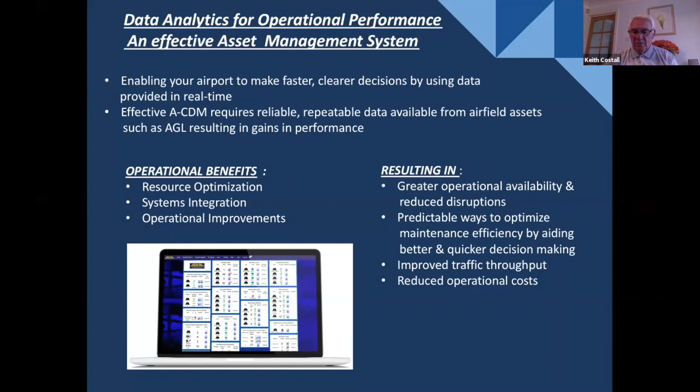But we've got a lot of challenges out there. A lot of it is because we've got to maintain an AGL system that is going to be used for different functions, like individual light control and monitoring as part of an advanced surface movement guidance system of today. And the bigger issue is that, until COVID-19 of course, the demand on a runway and taxiways, the density of aircraft, has increased tenfold in the last few years.

And therefore access for maintenance is also very, very difficult. So if you stay in the old traditional maintenance methods, filling in paper and signing bits of paper, then putting it into the office for somebody to copy onto the computer, it's time consuming and a big issue for us. So hence the need for an asset management system.

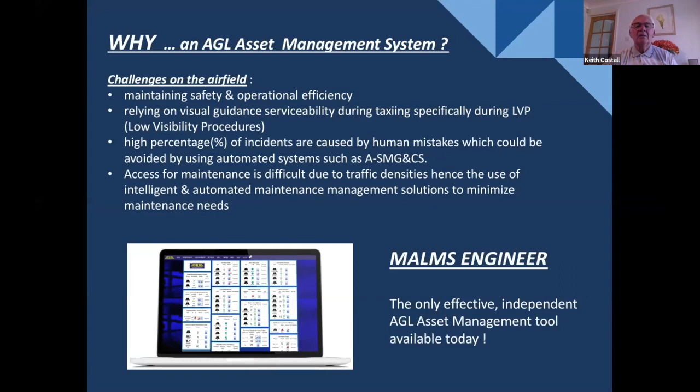And how do we use it? Well, we use it in an electronic format, so that if we do a particular function in the field - and we're going to learn a bit more about that from Rob later in this presentation - to utilize it, we need it to be in real time.

So if we go out, it's a bit like Amazon delivering something to your house. You don't sign a piece of paper now, they just press a button, that's it, you've received it, you've accepted it. It's electronic. And way back, immediately, Amazon knows it's been delivered safely.

Same thing for AGL. We go out in the field, we do a torque test, we do a photometric test, we change a light fixture, we do a cleaning, whatever it is, rectify a fault. It's a matter of just, in real time, pressing a button - bang, the records are there. Job done.

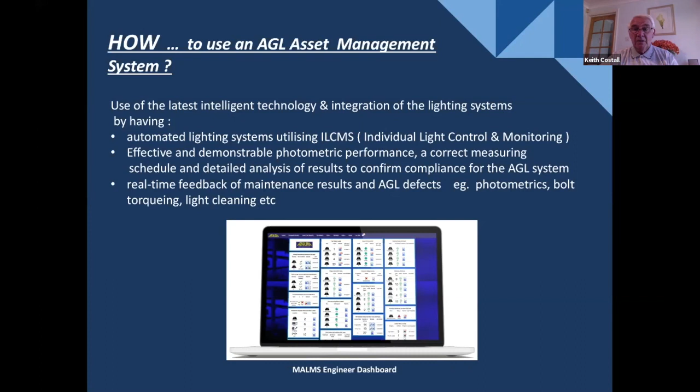I mentioned earlier about civil, mechanical and electrical. Well, civil and mechanical are the two elements that have really been outside the electrical side in many ways, because AGL personnel tend to be electrical people, and electrical people have come from constant voltage technology. So to go airside and work on AGL, you suddenly need to understand current-based systems rather than voltage-based systems. There is a difference, but we're not going to go into that today.

But on the civil side, we need to be thinking about the pavement, and there are new standards coming in from ICAO associated with how we're going to record civil engineering - the state of the runway and taxiway pavements, whether it's concrete or asphalt.

Mechanical, we're back to this torque tightness. We secure the light fixtures in pavement, or inset lights into a base unit, a can or whatever you want to call it, that we've already glued into the pavement, and they have to be torqued down to a particular torque tightness.

One of the big issues that came to me in the early days - someone said, 'Oh, we don't like this electronic method because that's Big Brother watching us.' I said, 'No, actually, we can prove that you did the job correctly, because one of the aspects of the electronic torque wrench is that unless you torque it correctly in accordance with the model of light fixture, it does not allow you to record the result. And therefore, you're actually proving later that you did the job, if there were to be an incident.'

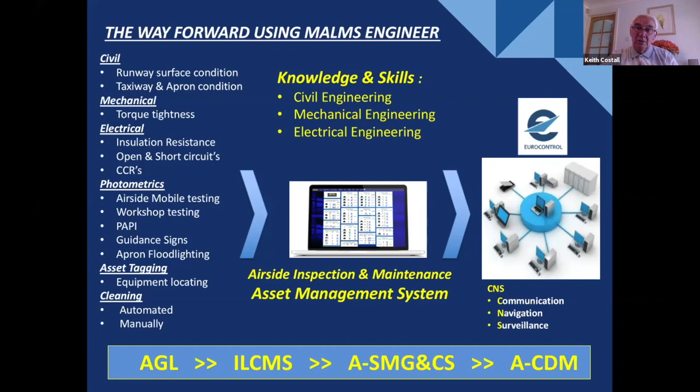Not only do we do mobile testing in the field, but also in the workshop. And that's where asset tagging comes in, because we can tag exactly where the light fixture is in the field, but we also can tag an individual light.

So I'm going to get on with this case study, based upon the airside asset management at London Stansted Airport in the United Kingdom. We have to thank Stephen Ryan, a consultant engineer who has been both the asset manager for the civils and electricals at London Stansted, and more recently as a runway asset lead. Unfortunately Stephen cannot be with us today—things have changed with COVID-19 and we have to prioritize our function because of that. So that's why I'm actually giving the presentation.

Let's have a look at the scope of the case study, and at Stansted, where Stansted International Airport comes from. It's part of the Manchester Airport Group in today's day and age. We'll look at how they integrated the MALMS asset management system with MALMS Engineer, the equipment associated with photometric testing, into day-to-day management, and how it enabled Stansted to justify changing the runway and taxiway lights from tungsten halogen to LED.

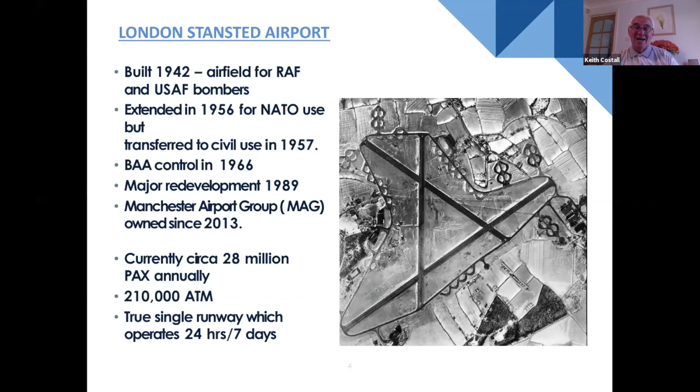So what have we got physically in Stansted? We have around 5,500 light fixtures, both on that single runway and on the associated taxiways, 176 guidance signs, and 134 CCRs. Now that's quite extensive—yes, it's not a big 2, 3, 4 runway airport, it's a single runway airport.

This is pretty extensive, and we have a structure of how we put together the maintenance team—there's 4 maintenance teams, and if you see here, 3 persons in a maintenance team on a shift, and that rotates on a cycle, supported by a day team.

So anything that is associated with the airport is managed by those guys. Now here's a picture I took taken off. If you went on to Google Earth, for example, and zeroed in, this is basically what you would see. So single runway.

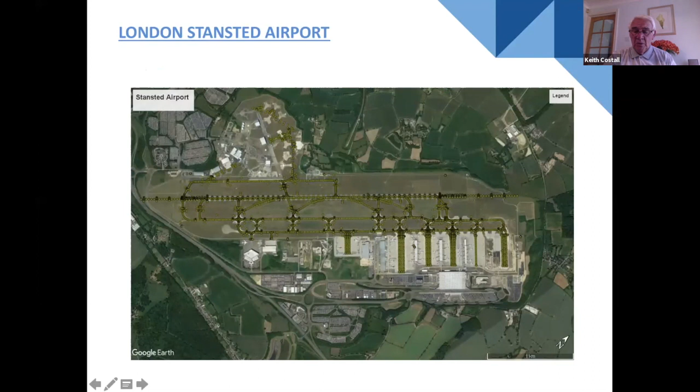Associated taxiways with stands. Stands are next to the main terminal and some remote stands. So where have we come from? Where we really come from is that to integrate MALMS into the maintenance management system, we started off doing photometrics, and that started around 2001, something like that, in Stansted to do photometric testing. But it wasn't until 2016 that it started to integrate into an asset management tool, so before that it was really a standalone.

Green demonstrates a compliant fixture, that is above 70%, not yet needing maintenance. The blue is between 50% of light output and 70%, which demonstrates you should be doing maintenance, and the red shows it's below 50%, then that is a non-compliant location. So that's the scenario how we look at it generally.

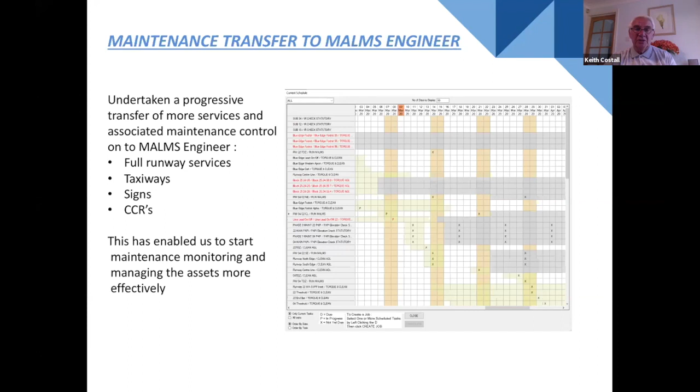As I said earlier, it demonstrates compliance, and what we can do is extract it, and Rob is going to go through it a little bit more intensely afterwards. But we can extract and present it in many ways, whether you want it on a spreadsheet, whether you want it in an email, whether you want it on a bar chart, there's different ways of presenting the accuracy. And it's not just accuracy, it's the repeatability upon demand in real time.

So we're in this period of checking performance in a progressive way, so that we're going to be looking at maintenance not just by saying okay, we'll do this task every day or every week, or I think the light looks dim, we'll have a look at it. We still do those kind of checks, they still do the runway checks down the runway periodically, and if a light fixture looks dim or out, it's recorded still in the same way.

That doesn't go away, but what we can do is input all the methods of being able to test compliance, whether it's cable damage, whether it's earths on the circuit, whether it's photometric, or whether a bolt has been recorded as coming loose. All those kind of things, we can measure the performance and record it in real time.

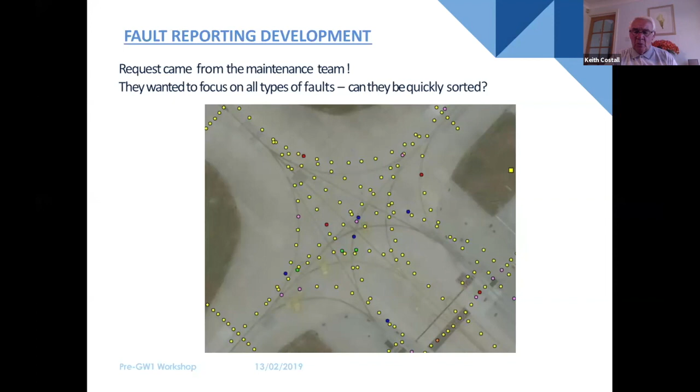Moving on, just to re-emphasize that.

How did Stansted utilize the introduction of this asset management, the MALMS Engineer and the dashboard into the maintenance management system? Well, one of the aspects previously was the fact that maintenance was being done, and it was being done by an effective team. But how could they prove it?

And how, when it came to saying, can we now transfer and migrate from tungsten halogen to LEDs? There is a drive in the industry to do that, and it won't be too long before manufacturers will no longer offer tungsten halogen at all, and potentially not even support them. So we've been driven down the LED route.

So to demonstrate why, if you've got the records, you can demonstrate how the introduction of LED is actually saving money. It will pay for itself. There will be a return on investment. LED fixtures are more expensive than a tungsten halogen fixture, but the return on investment is pretty quick. Now, all manufacturers claim different returns on investment periods.

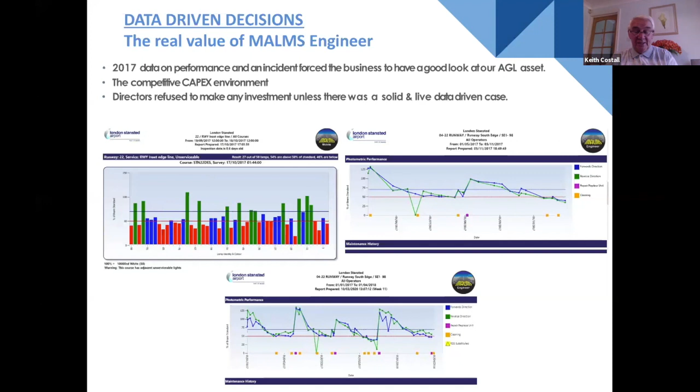It certainly helped Stansted, and it helped them with the decision of getting some of the capex money. Capex, for those who don't really understand, is the overall capital expenditure associated with how you invest into the future, and so the migration to LED was part of the capex.

So what is the real value? Well, previously in the paper era, it was always based on assumptions - let me show you this, let me show you that. This has really strengthened the business case, being able to demonstrate that the asset, as an AGL, has definitely improved and is saving us money.

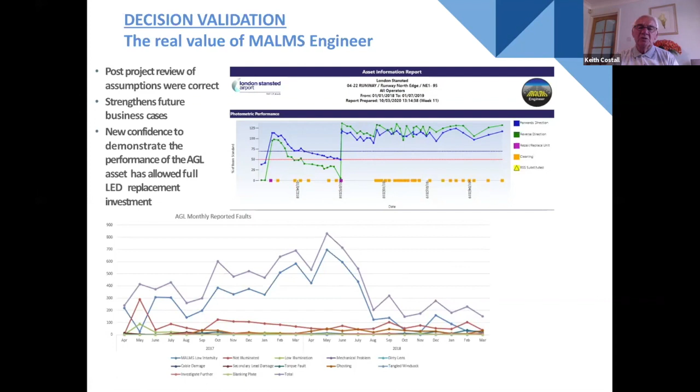Until we got to a stage of replacement between tungsten halogen and LED. Now, some of this was associated with cleaning cycles - we cleaned, then it deteriorated, then we cleaned again, then deteriorated, and other maintenance. But once we got to the LEDs, it's been a dramatic change. So it's a really good function and a good decision to have an asset management system, however complicated our airport is.

But now that's what we've got. So there's a dramatic change. And I think this is a good time for me to say, Robert, maybe you should come in now, because it's this migration from tungsten halogen to LED, but it's also the demonstration for IRVR credits, which is a UK based thing.

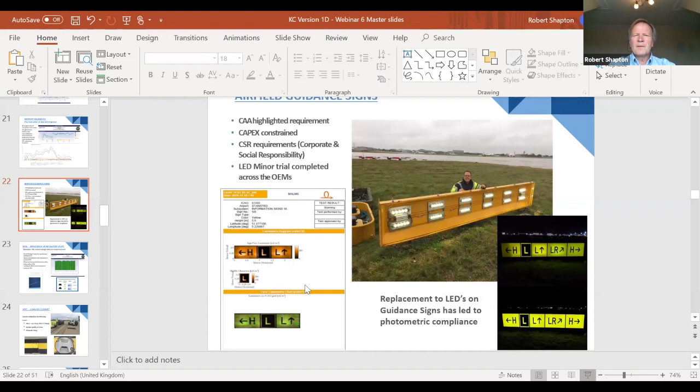Thank you, Keith. Excellent presentation as usual. Yes, so as Keith says, we were involved very much. We work with airports to help them. A lot of the initiatives have come from MALMS Engineer developments from our airports, our customers who need the information.

Increasingly, if you have a problem with signs, you need to get capex to be able to invest in them. So you need to do an evaluation to determine - because I believe we're talking about several £100,000 in the case of refurbishing these. But you have to compare the investment decision to replace or to upgrade.

And then with TMS, we provide the monitoring in terms of the results from the inspections, to support the business case. We also provide the tools to provide the measurements. We have a sign testing piece of equipment, which some of you are aware of, that we're now using at airports. It's not released for customer use yet, but it very soon will be. That is currently being operated by TMS, and we're measuring signs at Stansted, and there's Marcus Jelliman there.

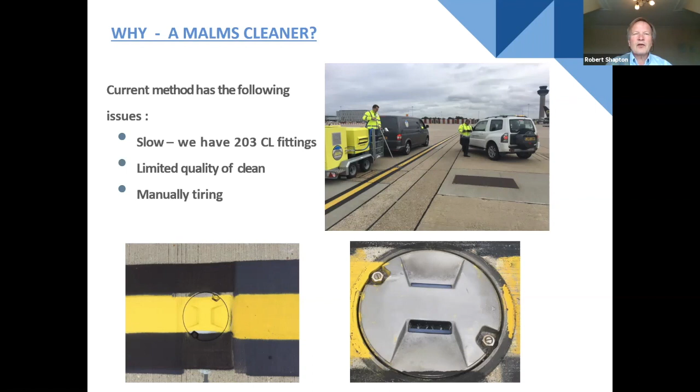So as a result, CMS some years ago were asked to develop a solution, and we came up with a bicarbonate of soda pressure cleaning system. It does not use any fluids. It's biodegradable, the powder, and it's highly effective. We discovered it's actually used for cleaning architectural buildings, and it is now being widely adopted.

Stephen Ryan has taken the machine into Stansted and has shown very, very good results. Even though the team there are hugely diligent with manual cleaning methods, you can see from the chart, using the MALMS cleaner, they were able to achieve their best ever photometric results. So while they were compliant before, they are now even more compliant, meaning the required period of maintenance and cleaning is less frequent. For a single runway airport, that's a highly critical factor to improve runway availability. You do not want to interrupt operations, or certainly as little as possible.

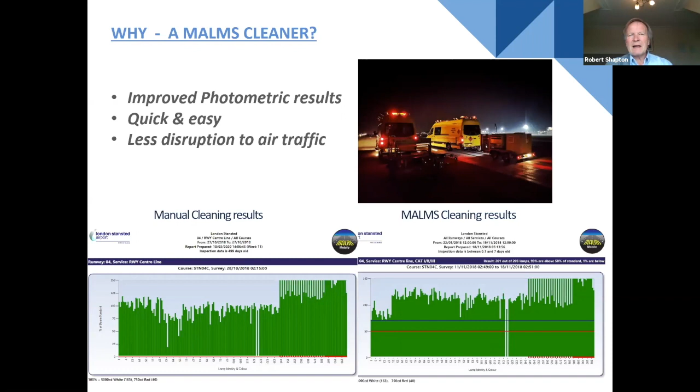So other areas of benefit from the measurements, as Keith has been pointing out throughout this series of webinars, you cannot manage what you do not measure. So actually capturing digitally the results of the work you're doing to maintain your runways in all respects is vital to asset management. That is the basis for your asset management, your decision making, and your business cases.

One of the benefits they've found is by recording the performance of their assets, for example their lights and the components used in them, they've been able to hold manufacturers accountable for aspects of the supply. They've been able to identify particular performance issues, measure them, and present real-time information to those involved, and to constructively engage in rectification. So it's proven very, very useful to Stansted and other airports.

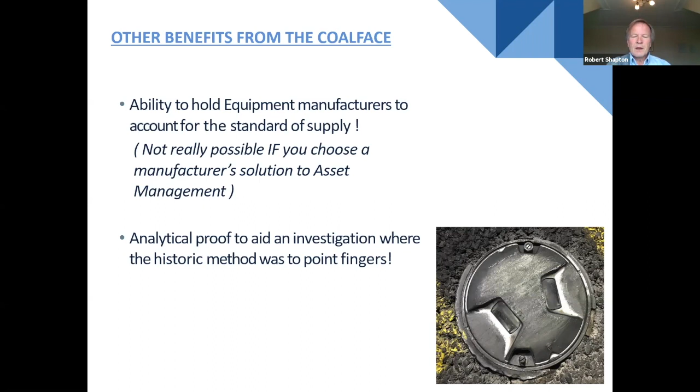The next area is civils. I have to admit that when Stephen came to me with this, and also our colleagues in Doha and Manchester, to include civils in the MALMS system, my heart sank a bit. We were so busy, but we're driven by our customer needs. So the team embarked on developing a civils package, which has proved extremely effective. The problem was, once again, that the systems available weren't particularly user-friendly.

They were also, in relation to civils, very static. The process was that periodic surveys were done, stuff recorded, and nothing was actually done real time. The tools are more in the nature of an audit, every one or two years, and then you go through a planning process, as opposed to real time capturing information.

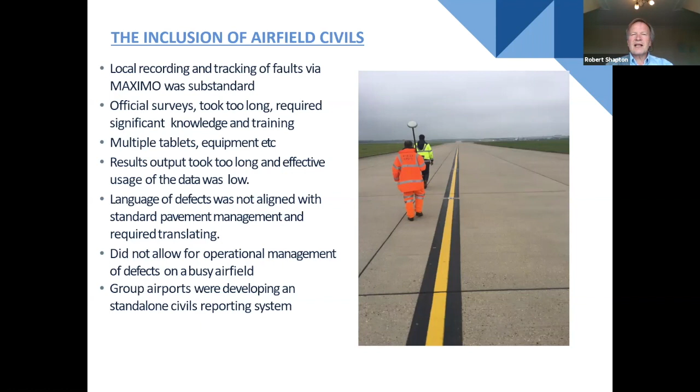What happened was that airfields doing their MALMS Engineer inspections using the tablet were seeing other faults, civils faults, and saying, well, why can't we record them on our tablet using our camera facility? Working with our colleagues in the airports, we developed the MALMS civil engineering package, which has been highly effective. At Stansted, they've developed some very new, market-leading, very effective methods of patching and doing selective resurfacing that has worked remarkably well. The traditional methods were annual surveys using architectural type equipment.

With MALMS, we've come along and use our tablet to record using the airfield map, logging the faults real time, recording the individual areas. We've developed a series of enhancements to meet the needs to categorize the different sorts of faults, to layer those faults as to when they've been identified, whether they've been fixed, how they've been fixed, the different types of defects, and then to use that information as part of the planning process.

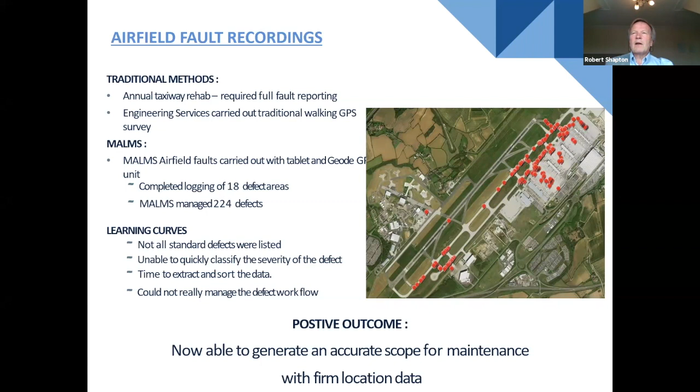This is a learning process. We've been developing this real time with customers, but I'm very proud to say we have a very responsive team, and the tool has evolved to give a very positive outcome, certainly for Stansted Airport and others.

Just very briefly, because we're running short of time, what they've been able to do is record the patching of civils faults, but then hold that information and use it to plan more serious resurfacing efforts, larger civil engineering projects requiring full closures, where they've been able to take up, based on the information provided, sections of pavement, and then in a two-layer process, replace those areas and those faults, which would traditionally have required a

resurfacing of the runway, have been shown to last, certainly some of them up to a couple of years now, without any sign of fault. So it's been highly effective, and I think very certainly worthy of investment at Stansted Airport.

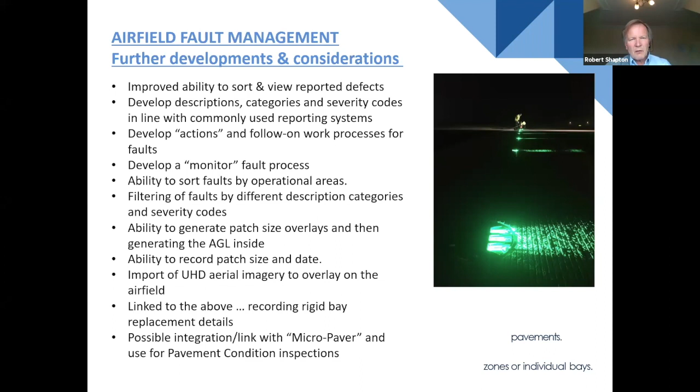But we're not stopping there. We're continuing to develop the process. I've been asked to look at integration with some of the traditional asset management packages or pavement civils packages, such as Micro-Paver, and we're in discussion with them. So watch this space. Like everything, what was good enough today is not good enough for tomorrow, and we're looking to keep up with the times.

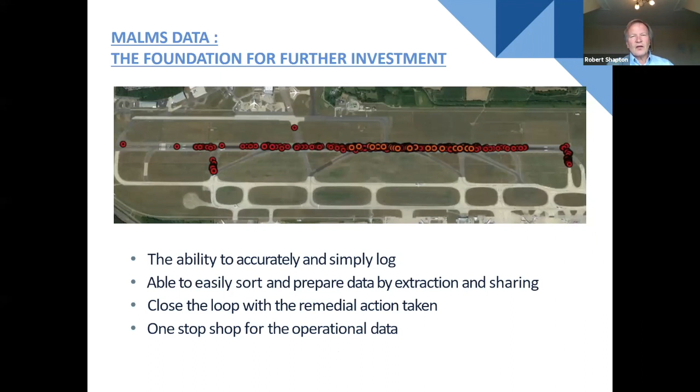So it's a foundation for asset management. It's a foundation for future investment, but you can't do any of that unless you can support it with the business case, which requires the measurement information to measure the problems and to show the effectiveness or otherwise of the solutions being employed.

Looking forward, as I said, nothing ever stands still at Stansted and other airports. We're now looking to track the performance of the fittings, not just the location. In the past, we looked at a particular place on the runway, a particular location, a particular service. But now, given the investments in all of the equipment at runways, we're looking to track the performance of those assets and manage the maintenance of those assets.

It's the whole life cycle. The runway is an asset, the AGL are an asset, the signs and the PAPIs, and they all have the same characteristics. They have to go through an acquisition process. So you need the measurement data to support the investment.

They need to be brought into service, checked for compliance on installation, and then monitored throughout service to make sure they're achieving the standards required. At the end, they have to be maintained, and there's a cost associated with that. So when looking at an asset, we have to consider the whole life cycle, from purchase to disposal, whether it's a runway, an AGL, signs, PAPIs, or any other equipment.

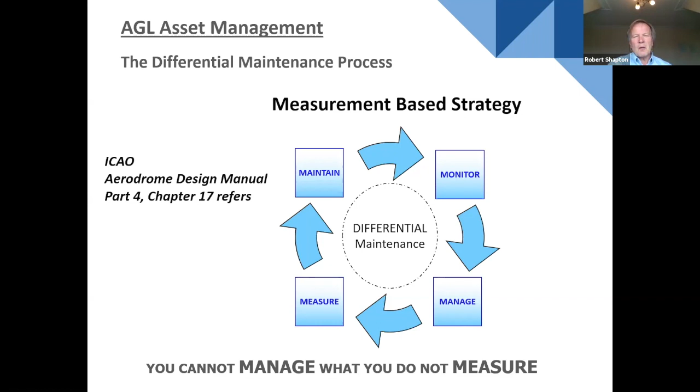We have the tools to do the measurements—the MALMS photometric systems, the torque management systems. We have the tools to support the maintenance, the recording tools to capture the data. We have the cleaning systems now, and within MALMS cloud and reporting, the ability to monitor and manipulate the data to achieve the optimal output. So, and I will not stop repeating this, you cannot manage what you do not measure.

So this all brings us nicely to the MALMS Engineer and dashboard. I'd like to introduce you to Rob Billingham. Rob is the mastermind behind this, and I'm so proud of the team—he's produced this wonderful dashboard supporting the information from MALMS Engineer, and he will now take you through some of the functions and features to understand how we turn monitoring into asset management.

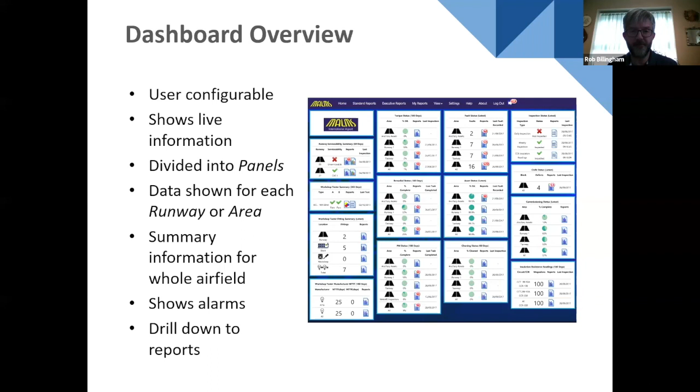Okay, so for photometrics, from the old MALMS office system, we've got runway serviceability, which is a bar chart broken down into service types - centerline, edges, TDZ, runway ends. And you click on one of those and you come down into your course bar charts, which we've already looked at, staple reports which engineers are used to looking at. And then you can drill down again into the isocandelas, to look at what's going on with an individual lamp. Next slide, please.

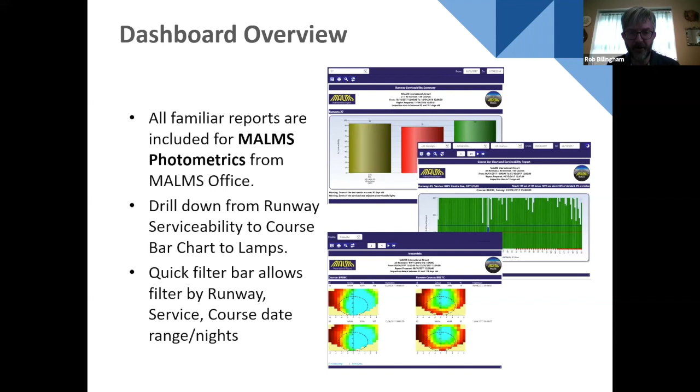We've recently added a new report called Survey History. The idea for this originally came from Dubai, who asked for some tabular data based on previous surveys. We then worked on this further with Heathrow, who had some excellent ideas.

For each lamp, we have a grid of information showing data for the last 12 surveys. So if you only survey once a month, that's a year's worth of information for the front course and for the reverse.

We also show an average, and a form factor, which is the number of times the lamp has dropped below maintenance level during the 12 surveys, and next to that, the number of times it's failed recently. It's almost like the form guide for racing or football.

You can pick out the lamps which are failing over and over and get them sorted out. You might have a lamp that's wired the wrong way and has always been like that, and you can see that straight away. You could pick up on circuit faults too, where every other lamp is showing a problem. So that's something we've recently introduced, which we hope will be useful.

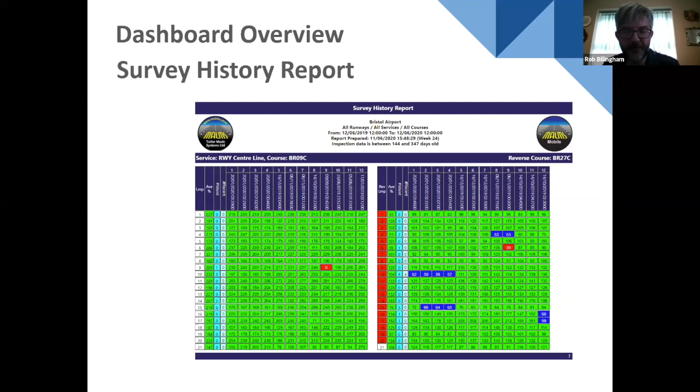For the MALMS Engineer dashboard, we've got information for torque, cleaning, civils, inspections, and all these follow the same consistent layout. We drill down from an area into zones and then into individual assets.

Each report has what we call the quick filter bar at the top, so you can easily move to a different area or zone without having to go back to the top level dashboard and start again.

We also have our share button, which offers all of the printing, export and sharing options, so you can instantly share a report with a colleague. All of this is there to help you with your day-to-day maintenance.

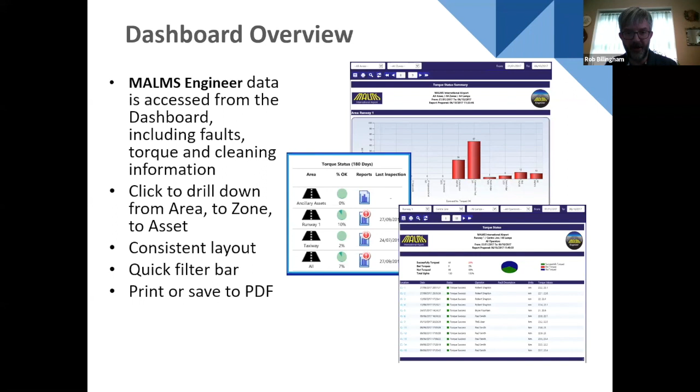For airfield or civils, as we talked about earlier, on the tablet we record a fault with photographs and comments associated with it, building up a log of the job as the fault progresses from when it's first reported to when it's closed.

We've developed these reports further with Stansted. We've added severities - low, medium or high - and further statuses: open, monitor, immediate action, long-term action, and eventually closed. All these are now available as filters, so you can produce a report of exactly what you need to be working on.

Okay, next slide, please.

Recently we've integrated the workshop tester with MALMS Engineer and called it Photobench Engineer. This is about when we tag fittings and track them, so we know whether they're in the runway, in the workshop, or on the shelf.

This asset tracking enables us to come up with useful things like mean time to failure, mean time to repair, and all sorts of new statistics. It's brought your Photobench Engineer operations into the cloud, with all the data there and visible.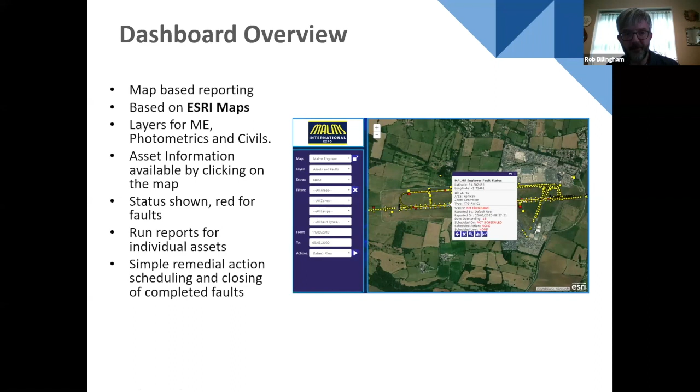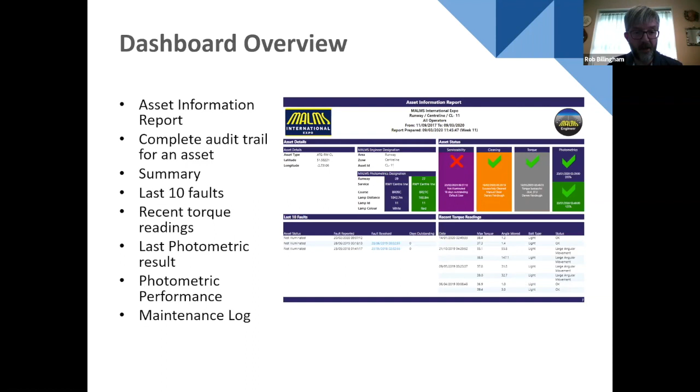So if you find a particular asset on the map that you find interesting and wish to investigate it further, the asset information report is a complete breakdown of everything that's happened to that asset within the specified time range. It's a complete audit trail. You've got a summary of the last 10 faults, recent torque readings, whether it's been photometrically tested and the results for each side, whether it's been torqued, whether it's been cleaned. It's all available as a complete summary.

On additional pages, you've got the photometric summary, complemented by logging of replacing AGL and cleaning. So you can see when the lamp's been replaced, you should expect the photometric result to go up, or if the lamp's been cleaned. You can monitor over time, and see how often you may need to clean or how often you may need to re-lamp. We also show a bar chart for the last test that lamp was involved in and its latest Isocandela drawings.

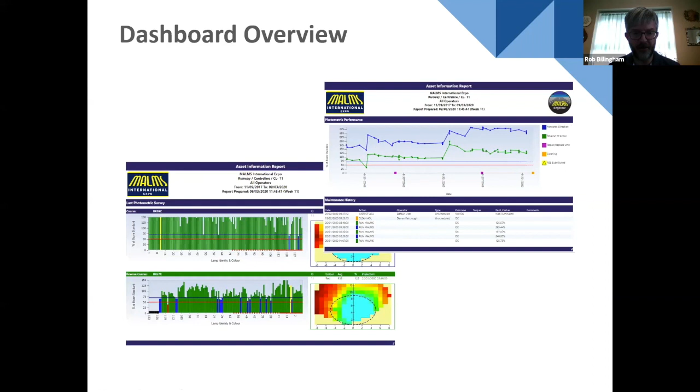Something else we can do with the map is create heat maps to show fault or action hotspots. So where on the airfields faults are most occurring, or where you have to do most actions, most re-lamping or most cleaning. All this analysis can be done from the map, to help you plan your preventive maintenance.

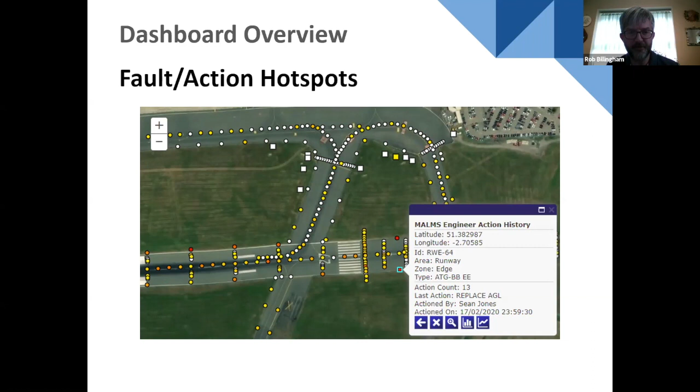Another use for the heat maps, a recent development we worked on with Amsterdam: if you calculate an average degree of movement for a lamp, for a bolt, when you torque it, you can start to build up a picture of where you may need to torque more often, or where you need to torque less. So you can concentrate your efforts on areas of the runway which need to be maintained more often - for instance, lamps within the TDZ, where plane wheels hit them more often, or on the taxiway corners. These will show in red or amber, and lamps that need torquing less will show in white.

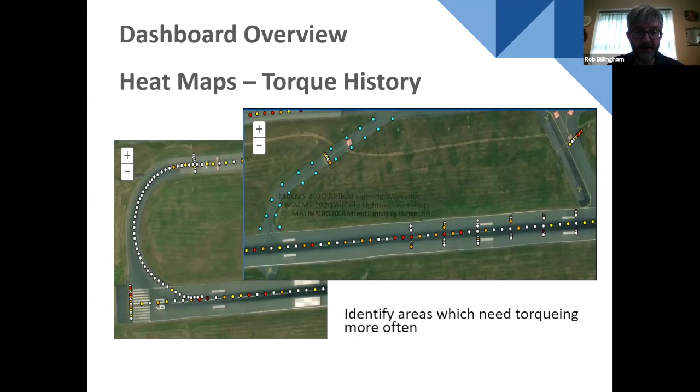For the airfield, we've done some development with Stansted, as Robert's already said. We started off by building up the application on the tablet, so the guys were logging a lot more information, doing severities, and more information about the status. We reintroduced blocks as well to break up the runway, so airfield faults are now contained within zones and blocks, and this color coding now matches the tablet application.

I've already mentioned email reports. We've recently done an overhaul of this system, so it's a lot more robust and future-proof for more volume. You can configure reports to arrive in your inbox weekly, daily, monthly, whatever you want, or when there's a particular event like an inspection completed or a photometric test taking place. These arrive as PDF attachments on an email, and you can set these up so they go to your whole team, to your management as necessary. We can help you configure these if you need that.

That was a very, very brief summary, even though we've run over time. I hope you appreciated that. Obviously Rob can be, and MALMS, we can be contacted, and we're happy to give individual airports, individuals, a presentation on this information in more detail. And if you have some or all of our systems, we will do it specifically using your data to help you understand and interpret more.